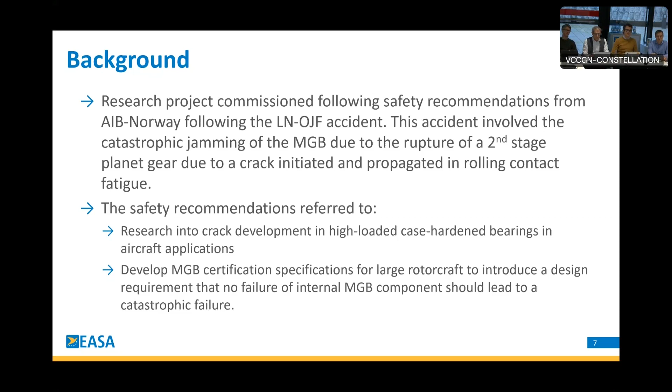So in the case of this particular safety recommendation, we saw some challenges. We've tried to do something with this research to identify ways to improve the situation, but addressing directly this safety recommendation was not found that easy.

So making the link with these safety recommendations, stream 1 is intended to address resilience of the rotor and rotor drive system to failure of individual components. By this, I'm referring to the tolerance of the rotor and rotor drive system design to continue to rotate, if possible, even to operate in case of failures of individual components.

So in order to do this, there were three main activities. The first one was reviewing existing helicopter designs, their configurations and design options when it comes to the rotor and rotor drive system. Then from that review, identify design weaknesses - components where a single failure could lead to catastrophic consequences upon the rotorcraft.

From these weaknesses being identified, the following step was to develop alternative configuration and/or component design solutions that could prevent or at least mitigate such failure. That would mean that, if possible, the failure would be completely eliminated, or if that's not possible, at least its severity will be reduced.

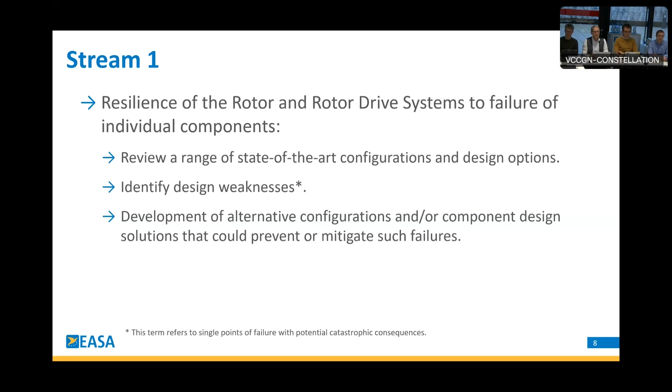So that's it for stream 1, which I guess you can more or less trace to the second safety recommendation that I mentioned before. And then stream 2, which is even more clearly related to the first safety recommendation - this stream was intended to deal with the reliability and tolerance to flaws in integrated bearing races subject to rolling contact fatigue.

Rolling contact fatigue is a kind of failure mechanism that we had not much experience with. This was identified in the accident report, and we agreed with that need. So for this activity, we followed the following approach.

First, the intention was to gather the state-of-the-art understanding regarding which were the critical design and manufacturing parameters involved and contributing to rolling contact fatigue. Within these parameters, just to mention a few, we could consider operating contact pressure, lubrication film thickness, clearances, surface hardness, case hardening depth, residual stresses, and surface roughness.

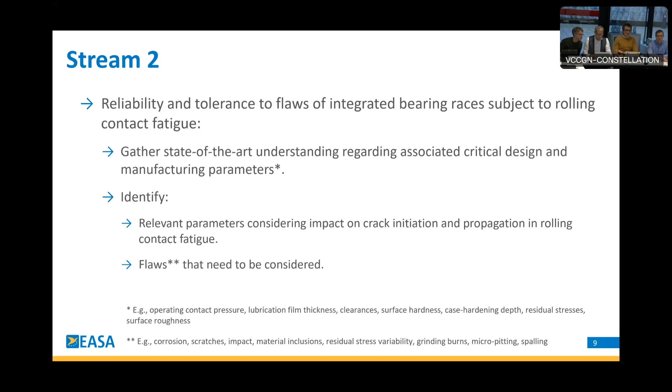When this step was completed, the plan was to put together an analysis and testing strategy in which the following need to be included: inner and outer bearing races needed to be evaluated, as well as carburized and nitrided low carbon steels, also as inner and outer race samples.

Then the impact of parameters identified as critical should be evaluated within ranges applicable to the rotorcraft industry - for example, testing contact pressures that are representative of rotorcraft main gearbox bearings. And then also ensure that we are having representative loading conditions, considering also other loading aspects such as body stress and residual stress.

From that point, the idea would be to perform any analyses needed in support of defining the final test plan, to fine-tune the geometry, adjust testing conditions, and so on. When everything's ready, conduct the test, collect the data, and analyze the data. Within this analysis, the idea was to include additional activities to cover areas where testing was not covering all possible parameter values that we wanted to investigate.

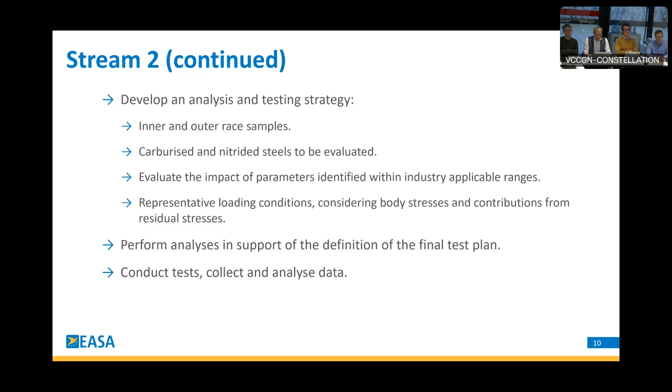We would try to use simulation as much as possible to understand better any changes. And then when all the activities were concluded, the idea was to be able to draw conclusions - first would be characterizations of the parameters that prevent the initiation of cracks in rolling contact fatigue.

Then the identification of flaws for which crack initiation and subsequent propagation may not be precluded. And last but not least, determine factors that promote crack development back to the surface rather than into the core of the race.

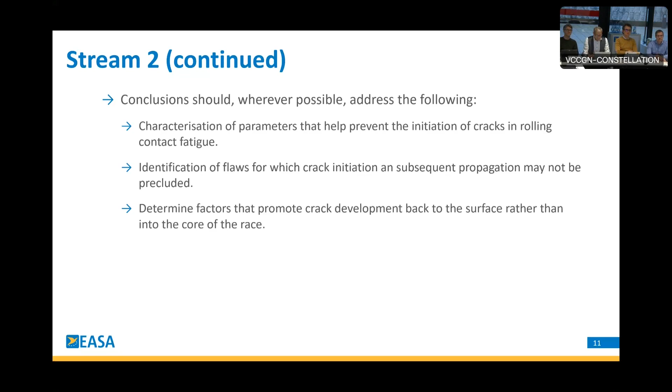So that's it for my brief introduction of why we did what we did. And now I leave you with Jörg Litzba from AH Technik.

Thank you very much, Rodrigo, for the introduction. Now, the following slides, I would like to give the overview of the project implementation and the key results as addressed and commented by Billy in the beginning.

I want to give a short introduction into the agenda of my slides. Of course, I would like to give you first an overview, then go into the details of Stream 1 and Stream 2, and have a summary of the project, and I would like to draw the conclusions at the end.

Starting with the overview of this project, the title was called Integrity Improvement of Rotorcraft Main Gearbox. Since we use some acronyms for the project, we called it GIFT MGB. As you can see on the left side, it's taken from the project title.

It was already mentioned that the background is the accident of the LN-OJF and the related accident investigation findings. The project, after the public tender, ran between June 2020 and March 2024.

The project team itself was made from Airbus Helicopter Technik as the project leader, with the project partners SKF Aerospace, University of Hannover, Department IMKT, and the University of Paderborn, Department WUZ.

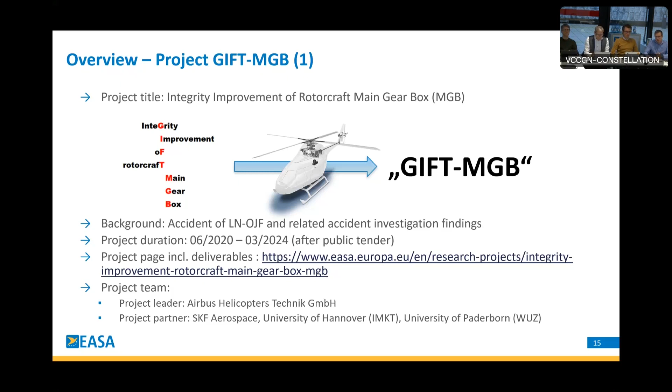Now let me continue with an overview. The project itself is split into two nearly independent work streams dealing with separate aspects of the overall project topic.

Stream 1 is dedicated to a global review of Rotorcraft architectures with regards to the drive system. This links to the second part of Rodrigo's introduction: the review of state-of-the-art Rotorcraft gearbox configurations and component design, with a description and supporting evaluation of these architectures and individual components.

This works out based on design proposals, leading to recommendations for future MGB designs where the aim is to prevent or at least mitigate catastrophic failure modes.

Stream 2 itself is dedicated to baseline research with regards to rolling contact fatigue, shortened here to RCF, on integrated bearing races, where the focus is on determination of the design parameters for component reliability and flaw tolerance under RCF, to determine factors that impact crack propagation and possible crack through.

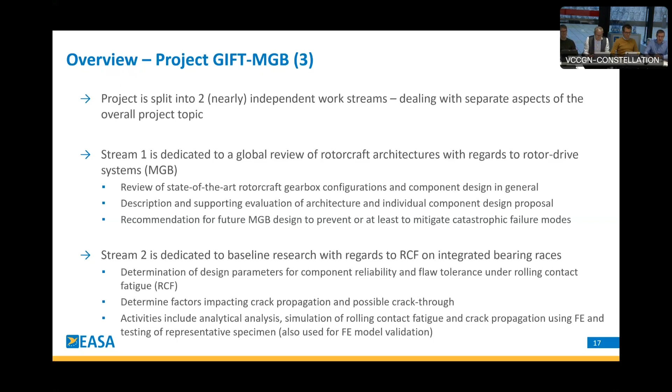The activities include analytical analysis, simulation of the rolling contact fatigue and crack propagation using finite element, and of course significant testing using representative specimens.

Now going further into the detail of Stream 1. To give an overview first, the analysis was done with a focus on differences of the configurations, mainly epicyclic versus collector, using a failure flow diagram approach based on a potential failure modes and consequence analysis.

This also considers field experience, not only in aviation, but also automotive and wind energy, since integrated race-based bearings are not only used in aviation. The failure flow diagrams that were developed use a generic methodology.

Step 1, generic failure flow diagram, then further broken down to the MGB architecture, and then further on going to the flow diagram for the single component.

The analysis includes relevant OEM and drivetrain architectures, but using public data. It's important to note this because the analysis is based on public data, and the nature of that public data means it cannot be excluded that any OEM internal analysis based on further details may lead to different results, for example regarding criticality.

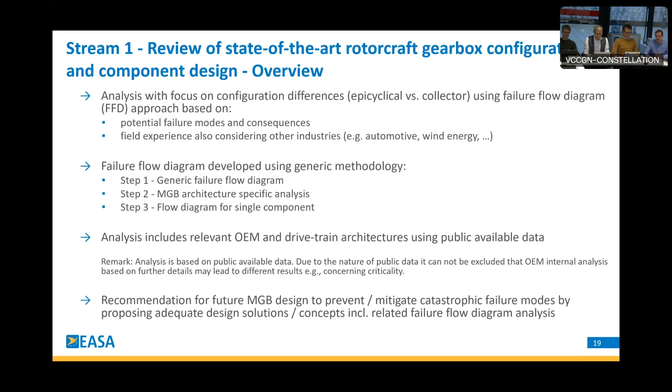At the end, a recommendation for future MGB design, as mentioned, to prevent or mitigate catastrophic failure modes, was done by proposing adequate design solutions and, of course, looking again into the failure flow diagram analysis.

First of all, we did the failure mode analysis and we reviewed accident analysis on relevant helicopter accidents in view of root causes and conclusions out of them. A failure mode analysis focused on the load path elements, mainly gears, bearings, and shafts, where integrated races are used. You see it here in the tables on the left side.

It's a big chunk of data that was looked through, analyzed, and reviewed. On the right side, there is an extract on a planet bearing failure mode analysis, where we have, for example, a lubricant having an effect, with not enough lubricant leading, for example, in 43% of the observed damages to rolling contact fatigue topics, such as worn surfaces, discolorations, and so on.

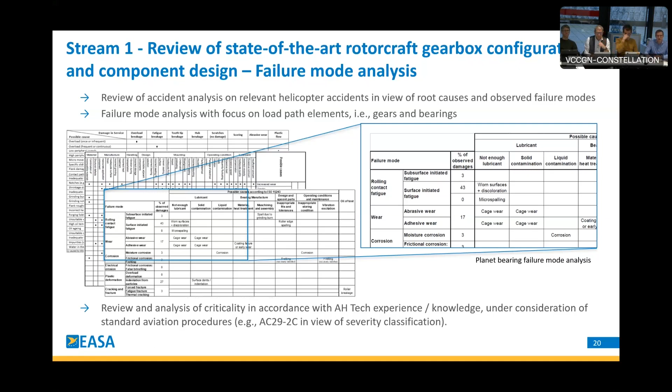Now, the review and the analysis of this criticality was done in accordance with the AH Tech, or ZF, formerly ZF, experience and knowledge, but under consideration of standard aviation procedures. For example, when we did the severity classification, we used the AC29-2C.

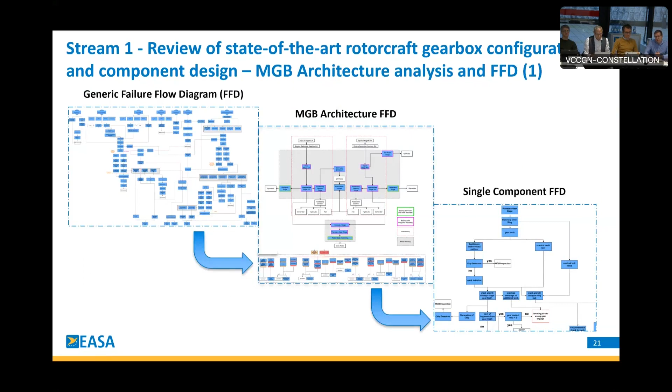To give you an overview of the FFDs, we have the generic failure flow diagram, the FFD, and you see it's quite a big diagram, which is then further used for the MGB architecture FFD, and then transported and transferred to the single component FFD. In the next slide, I would like to dig a little bit deeper into this. I hope you can see the arrow of the presentation, I'll try to do it slowly.

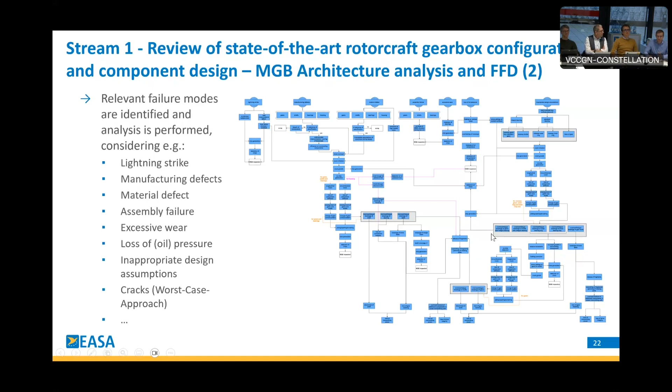On top of it, we have started by considering relevant failure modes, which could be a lightning strike, manufacturing defect, material defect, assembly failure, loss of oil pressure, and so on. We looked at the effect of these failure modes on parts like gears, bearings, shafts, and so on, and assumed not spalling or micro-pitting, but cracking. By working up through the FFD, we looked at whether we can detect it, for example by chip detection or chip alarm, or if we have a crack and a potential catastrophic failure coming from the failure modes on the single part.

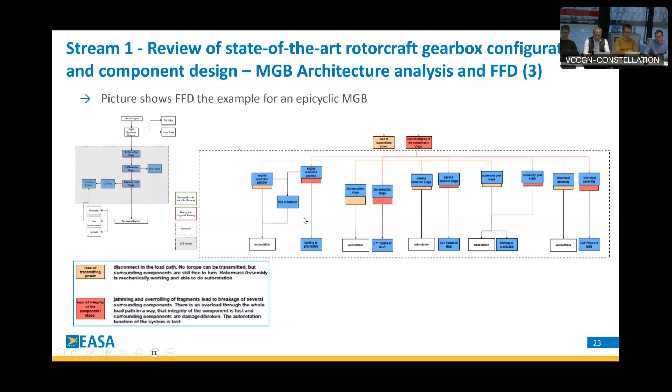These red marked sub-assemblies are then further used in the FFD analysis to go down to component level. You see it here, the second reduction stage, where we start with a planet carrier, for example. There we assume there is a crack of the connection and we walk through the potential effects. On the left side, we will end up in MGB inspection, and power transmission is ensured, so no problem. If we continue other potential failures based on this cracking, we could end, in the worst case, in a jamming of the planetary gear stage.

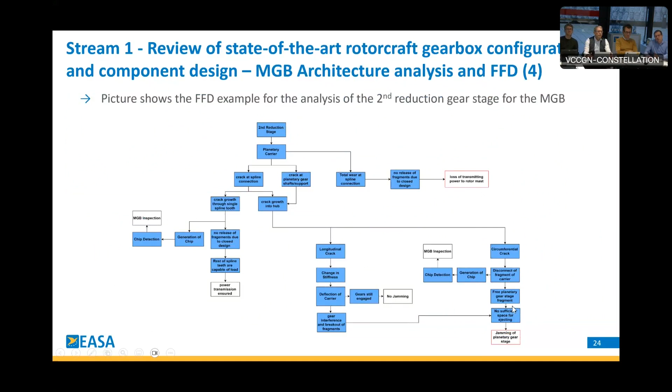A little bit too fast, sorry for that. By this, we know the exact path and we know the component on which we have to focus next.

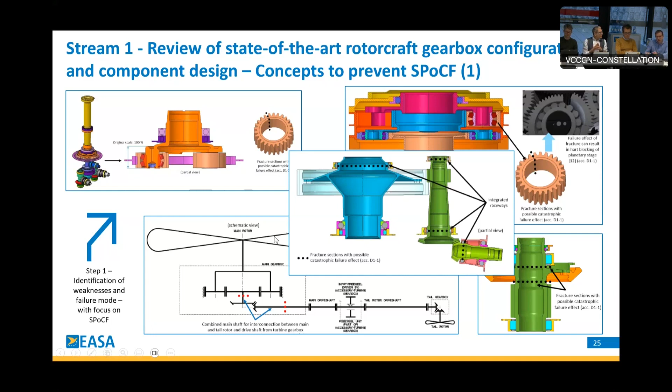On the next slide then, we have step two.

In step 2b, the development of safety barriers was done, and it was checked in an additional FFD analysis if these design changes, these safety barriers, would lead to a non-catastrophic failure at the end, if the FFD analysis result would change.

To make it more applicable to a certain application, I have an example of a planetary system where we would have at the end a jamming of a planetary stage. We have several possibilities in this architecture to avoid this jamming.

For example, introduction of a non-integrated bearing as a safety barrier, or the definition of the side parameter to avoid crack growth into the bearing, or a design implementation to support ejecting of particles from the gear mesh, which means avoiding the jamming.

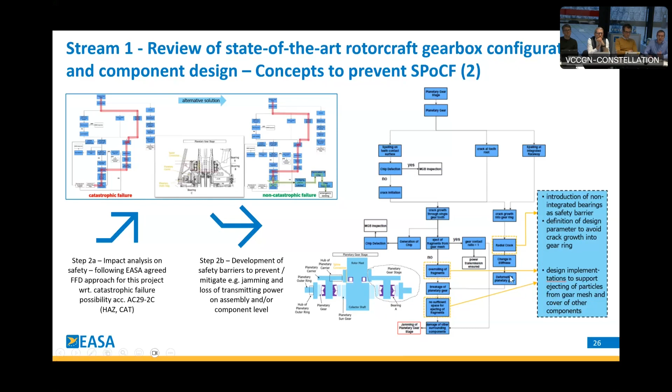Having done this, the next step was to do step 3, the pre-designing and detailing of these safety barriers, and to apply it to this existing concept, to these existing architectures.

For example, here you see it on the left side. There, number 20, is the introduction of an inner bearing, so there is no integrated raceway anymore. In the middle, on top, there is a so-called bordure retaining ring, which means it would hold the planet parts together, so the planet parts could not go into the meshing and jam the planet gear stage.

If you go down, for example, for a shaft, so no planetary solution, a collector solution, this is number 5 here. There's a so-called jamming preventer introduced, a sort of dedicated shaft which would support the shaft in case of a rupture. This means there's also no jamming of the gearbox.

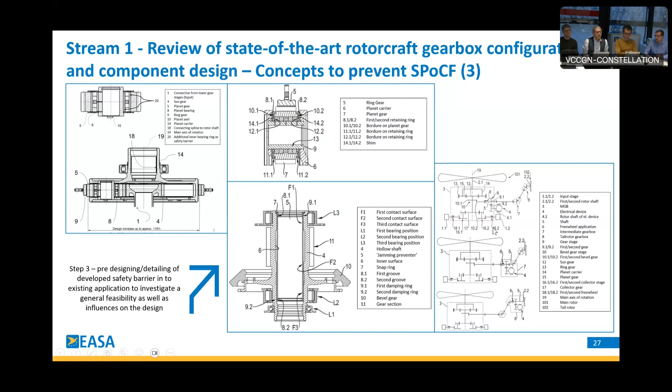We also looked into generic or rotorcraft architectures. There are several options, I do not go into the details for now. It can be looked up in detail in the deliverables as mentioned before.

After the design has been completed, we needed to evaluate somehow how realistic these concepts are. So this is step 4, the application and the concept assessment and the prioritization of these several design solutions.

Why? Because we needed to check further what impact such a design solution has. For example, is it feasible anyway, or is it just a wild idea? Are there boundary conditions, obstacles you need to consider if you want to apply it? There's also a question of what is the most promising solution, and are there any economic aspects to be considered, like more parts to be manufactured or something like this.

But there are also disadvantages or advantages. For example, how significant is the influence on level of criticality? And what is the impact on, for example, the weight, the size, or the number of quantity of parts? In detail, the project delivered a matrix with the solutions, the description, the evaluation, and a certain ranking of what has the highest potential.

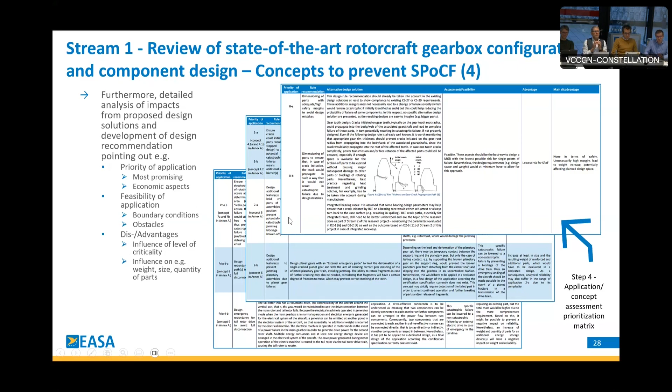Now this ends stream 1, which was more focused on the gearbox architecture at the end. I would like to continue now with stream 2, which is focusing on rolling contact fatigue and the influence on crack initiation and crack propagation.

Again, I would like to start with an overview to give a rough idea of what I'm going to talk about in the next minutes. The investigation here is focusing on fundamental understanding and potential prediction of crack propagation on integrated raceways that are under rolling contact fatigue.

Part of the stream was the analysis of available literature and field experience coming from relevant applications, to see which influence parameters are there, to look for state-of-the-art design methodologies, but of course also to have the lessons learned from accidents and from other investigations.

A test campaign was performed using representative samples for helicopter MGB design, meaning dimensioning, material, manufacturing, loading and so on were considered, where we had the necessity to specify the test specimen, the test conditions, and the test benches, then manufacture the specimen, test according to the test plan, and do a very deep analysis of the test results.

In parallel, and also for validation and verification of the testing, and vice versa, we prepared an FE model definition and validation where we implemented the relevant parameters, for example residual stress condition, loading due to rolling contact, and/or body stress, and we performed simulation of the crack propagation also for various parameter settings.

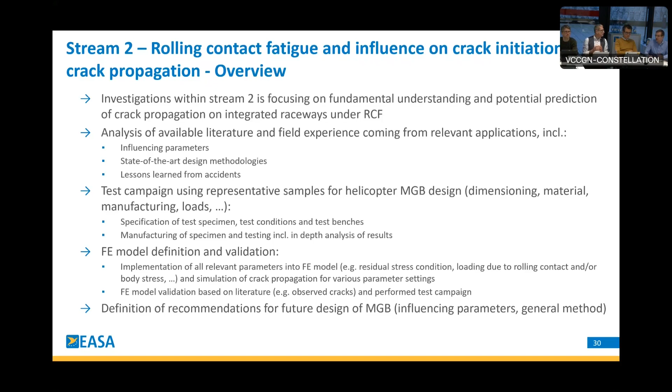Now, first of all, we needed to look into the design criteria and the related parameters. We did select the starting point as a review of the experience on design parameters for typical aviation applications, with the focus on relevant type of bearings, mainly here SRBs and CRBs, meaning spherical roller bearings and cylindrical roller bearings.

The project team discussed known field failures and observed failure modes, also including a cross-effect analysis of these design parameters, which then led to a fishbone analysis on crack initiation and subsequent crack propagation, including the damage, where relevant aspects from the previous analysis were taken into consideration.

Finally, each parameter was evaluated concerning the criticality with regards to crack initiating and crack propagation. We selected low, medium, high, to not have a 1 to 10 or 1 to 50 grading, but we prepared a matrix where we said, for example, we have a parameter.

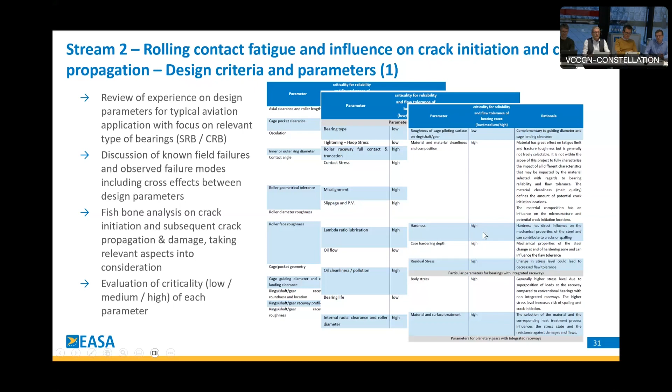Let's take one of the prominent examples, residual stress, which has clearly a high criticality with regards to the open technical question. And then we have a rationale here why we rate this as high. For example, if you look to residual stress, a change in stress level would lead to decreased flaw tolerance. Each of the parameters analyzed are in this matrix. You will find the rationale in the documentation, and this was the baseline for the next steps.

The next steps were then how to deal with the various aspects and how to look into the rolling contact fatigue that is known from the past, the crack initiation, potential crack propagation, and potential crack through. The project decided to develop three main hypotheses based on the mentioned analysis and detailed literature research.

First hypothesis: in case of a pure rolling contact load, an initiation of a crack with a finite depth may occur, but the crack growth ends at a finite depth. A crack typically leads to spalling damage, and this crack growth towards the surface is known for pure RCF. But crack growth into the material is known in combination with a second driver.

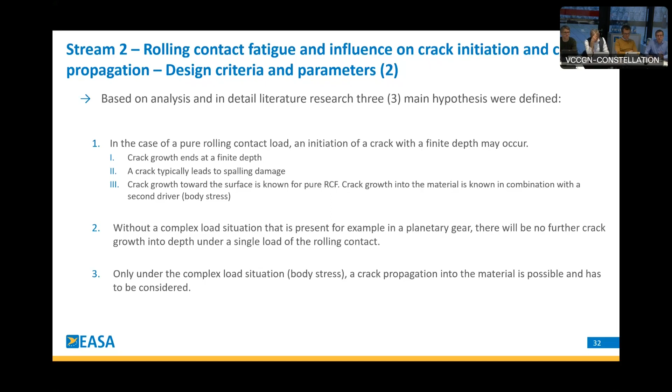This is then leading to the second hypothesis: without a complex load situation, as present for example in the planetary gear, there will be no further crack growth into depth under a single load of the rolling contact. And finally, under the complex load situation, if we have body stress, a crack propagation into the material is possible and has to be considered.

These three main hypotheses were then further used in the specification of the test specimen, and the test specimens are required in accordance with the three main hypotheses. In the project we needed a clear separation for the test campaign, meaning the test phases are named accordingly.

Phase 1.1: pure rolling contact fatigue for different contact pressures. Phase 1.2: rolling contact fatigue plus maximum contact pressure, including a variation of relevant parameters. And phase 2 is the complex loading.

A parameter analysis was further done as a baseline for the test specimen, having the following targets: we need to ensure that the samples are representative, and it should cover the widest possible range of parameters that are still acceptable, because we need to look also at the statistical analysis of this testing. It should consider aviation typical application, for example material loading, and we need to give prioritization to design parameters in view of a project target and expected impact.

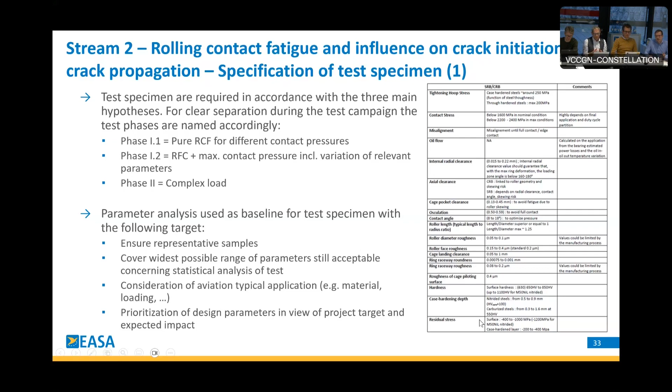This was the baseline, of course, only on the micro level. We talk about contact stresses, about micrometers, we talk about stresses in the part, but we need, of course, also to look at the macro level to have a representative sample.

And therefore, we made it quite easy. We looked at the MGB analyses, done in Stream 1, for example, and we looked at where we typically have the integrated raceways. For an epicyclic design of an MGB, I think it's obvious we have the planet. On the planet, you see it here, it's a CAD modeling just for representative reasons. We have the test specimen called ring, in a version standard ring and ring with a notch, for the complex load situation - I will come to this later.

And if you look at the collector design, for example, we take a shaft, and on this shaft we could have integrated raceways. Since it is a shaft, the test specimen is called shaft, in the version non-hollow and hollow, here too for the complex loading, introduction of body stress, and so on.

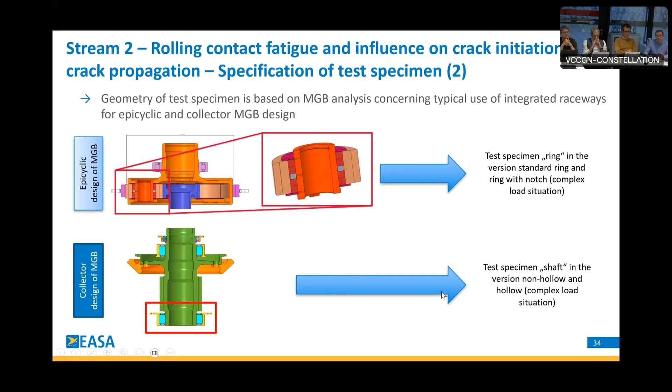A transformation of all of these aspects was necessary with regards to the number of specimens that we needed. So you have seen that we have heat treatment, design parameters, and so on. But of course, we need to select the number of test specimens in a way that we can handle it in the project time and in the project scope.

Based on this number of samples, we said that we will spare 3 additional specimens for phase 2, for the complex load, but selected based on the results of phase 1.

Manufacturing parameters, mentioned before already, selected in view of processes for comparable parts, meaning standard aviation. But we needed an additional process step for the notch that was mentioned, to ensure that we have the good ovalization, the body stress, and so on. And therefore, we selected EDM, electric discharge machining.

One remark here: the white layer of the 32CDV13 inner ring specimen has not been removed. This was a project decision based on some aspects that were discussed in the project team.

And of course, as all of us know, if we have a manufacturing process, sometimes we have a slight deviation, a little bit outside on this side or a little bit too low, but all of these deviations were acceptable, were checked, and had no impact on the test results.

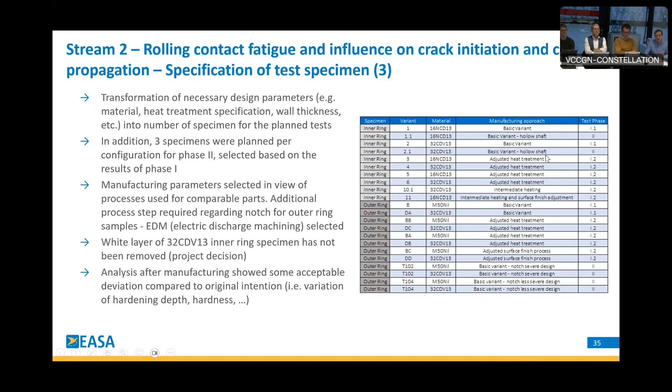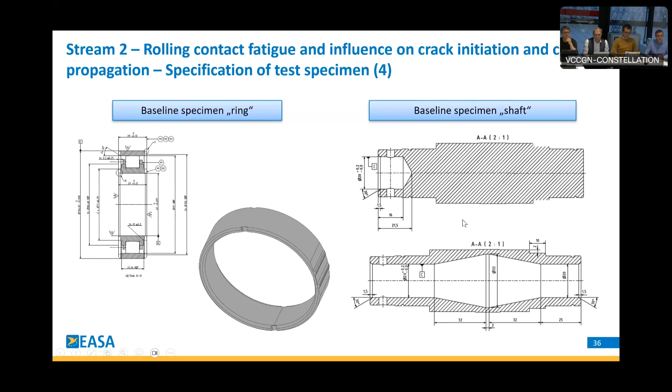Before we did the life testing, we had test specimens and used standard indents comparable to overrolling damage you could expect. But we saw that the initial damage, the spalling we needed, took so long that it would not be feasible in the time frame of this project to wait for, which is also a bit unpredictable. Therefore, we selected a pre-damage modification to ensure a plannable and reproducible spalling damage.

This was done by an indenter with a diamond tip and a force of 100 Newton. So in each test we can ensure a classical spalling damage in, I'll call it short time, but it's still an overall testing time needed to do all the tests in this project. This was leading to the starting point for potential cracks, crack growth, through-cracking, and so on.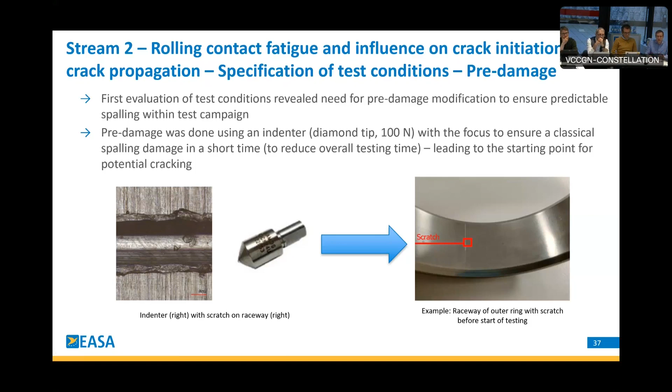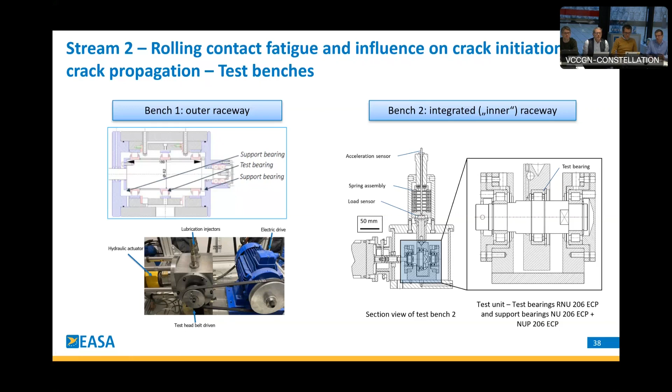The other test bench, on the right side, is also comparably small—it's the inner raceway. It's the shaft specimen where we have the test bearing with integrated raceways on the shaft, and we have the support bearings here. To give you an idea of the sizes, the bearings are type 206 bearings, which are also typical bearings used for any other bearing research project. So, comparably small.

Now coming to the test campaign results for phase 1.1. You see here the pictures we observed. Typical spalling damage was observed for all specimens at 2.4 gigapascal. For the 32CDV13 shaft specimen, we had a peeling of the white layer, so not typical spalling, but peeling—you see it also here in the picture on the right side. There was no spalling at 1.8 or 1.5 gigapascal, and no crack propagation into the depth.

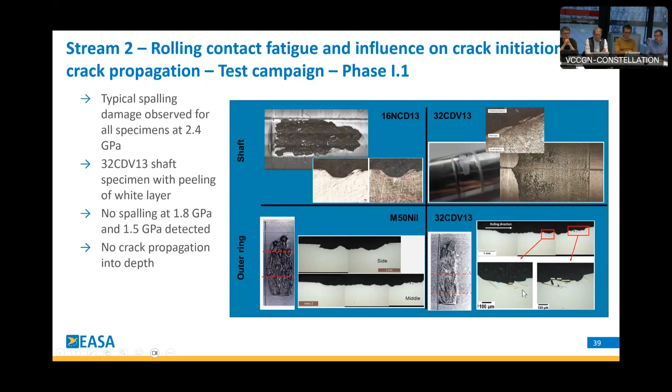You see here, we made pictures of the spalling damage, and also the scratch here. The mouse is a bit slow, so I'll try to go over it. We always evaluated these damages by metallographic cuttings, also to look for subsurface cracking, and you see it here. The cracks always rest at the same finite depth here at the end. But at the end, it was always spalling.

In phase 1-2, we had a variation of hardness, hardness depth, residual stress, and so on. We saw a variation in spalling depth, but we also did not notice crack propagation into the material. The results are generally comparable to the phase 1-1 results, meaning crack growth ends at the finite depth, mainly in line with the spalling depth.

Here's an example on the left side of the residual stress and hardness measurement results, done also to verify that the manufacturing settings and desired targets we want are met. On the right side you see the evaluation of the maximum detected spalling depth for 16NCD13, and the peeling, as I mentioned, of the white layer for the 32CDV. This is the shaft application.

And we see some influence. You see it here for version 1, it's a depth of 0.3, whereas it's 0.1 to 0.15 otherwise. You also see a difference in the peeling of the white layer. Now the question is, based on statistics, whether this will remain if we test 10, 15, or 20 specimens. There is a small result noticed, but I have to say it could also be that for the 3 tests, it's maybe only 1 result.

But there is a difference compared to the outer ring application. The observed influence is not as drastic as for the shaft, for example. You see on the right side bottom, for the outer ring application, it's always plus minus 0.4, for example, here. So the spalling depth here is more or less comparable and the same.

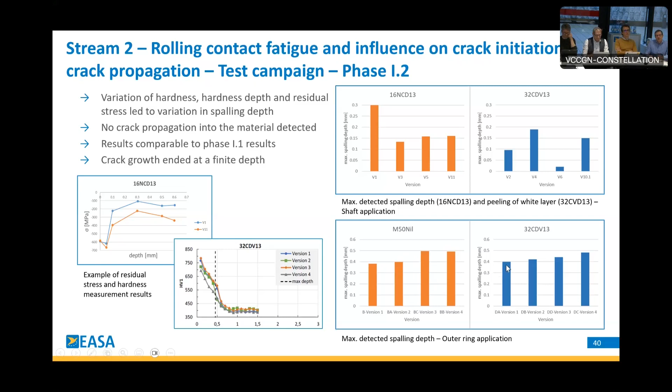And then we went on to phase 2. For the complex loading phase, we started with the shaft testing. For the shaft, first of all, we did find crack propagation into the depth, and for sure not through the part.

We first started with the standard indenter scratch, as mentioned before, but this just led to the same damages as before, spalling, so nothing else. To provoke crack through in the part and help it be more critical, we decided to modify the scratch and add a deeper damage by laser to initiate a more severe crack initiation, to have the crack-through propagation promotion as a pre-damage.

You see it here on the right side, the upper picture, the shaft with the laser-introduced damage, after the test with 2.9 gigapascal. Below you see it with the 32CDV. You see the same pre-damage and crack growth, but whatever we did, we didn't achieve a crack through of the part.

So for the shaft application, we saw spalling damage. As you see here, the surface is spalling, peeling, but even with this large crack initiation, it does not lead to a crack through of this component.

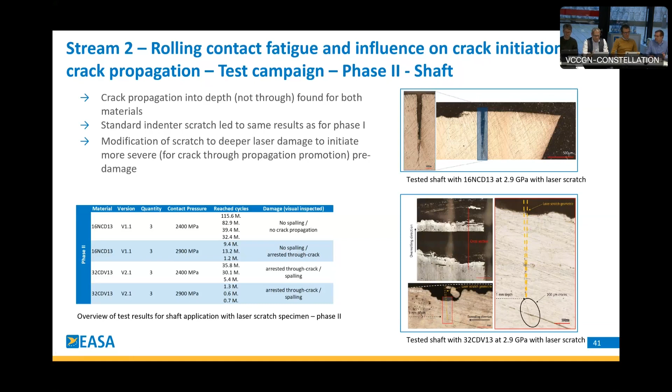If we then go further to the outer ring, we had a crack through detected for M50 nil at 2.4 gigapascal, and the 32CDV13 cracked at 2.9 gigapascal.

In general, we noticed a difference in spalling behavior, and you can see it here if you compare the complex and the non-complex load situation. The green one is the non-complex, phase 1, and the gray one is the phase 2, the complex loading. You see the significant change in spalling depth, and for the M50 here, for example, it's quite clear that you see a complete breakthrough.

So at the end, finally, we had a result which showed us that the test setup is leading to a crack through, but it was, I think, overall harder than expected to get this cracking damage.

In this overview here, you see the tests performed with M50 nil with 32CDV13, and you see a slight variation on the notch here. You see also that we had several quantities and we had a pre-test done. You see it here, the pre-test.

For the pre-test, for example, we had a spalling with a through crack. And if we then look to the same test here, we had the spalling, but no cracking through. So we had some problems here to get this cracking, which was further analyzed. But at the end, you see that you can initiate the cracking.

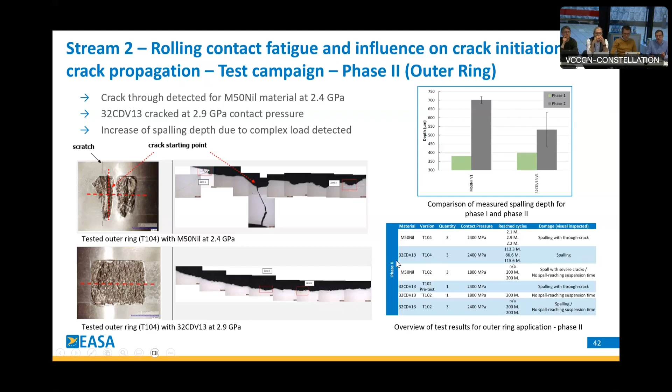Now this is the test side, and I mentioned before that in parallel we also looked at the simulation side. Of course, to handle each effect, we have the helicopter, we put the full MGB in, a full 3D FE model with a lot of nodes, a lot of details in the mesh, but this is quite huge.

You could use a sub-FE model of a rolling contact area, focused of course on the bearing, but even this would lead to significant long calculation times. We checked it in the project, and due to the needs of the project and the desired simulation content, we did a model reduction.

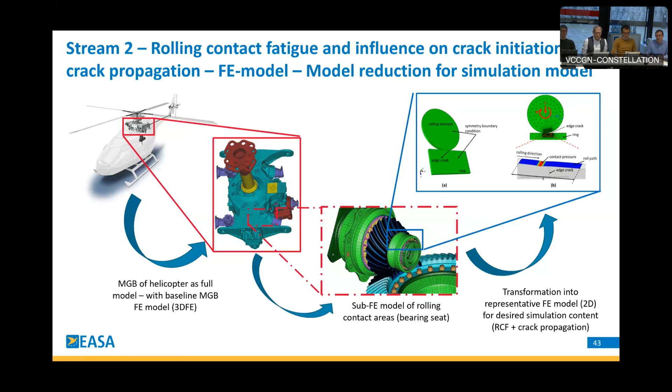We transformed it into a representative 2D model, which was used for the RCF and crack propagation analysis. Nevertheless, for generic design and analysis, it's always possible to go back from the 2D to the 3D. But for this project, the 2D approach was the good approach, and I'd like to show this on the slide, because next you will see the general approach for the crack propagation analysis, on an example FE model for the complex load situation of an inner ring, the hollow shaft, and the ring.

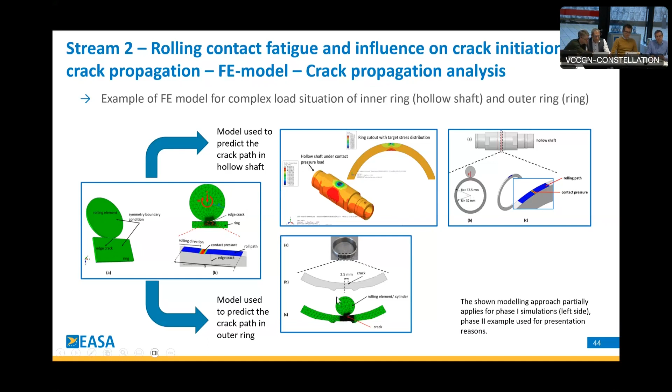We have mentioned already the importance of residual stress, so we implemented the residual stress into the FE model using a thermal stress approach, and we did measurements for this. To show you one example, we selected the hollow shaft, but it's also valid for an outer ring. On the left side, you see the cut parts and the measured values for the residual stress, measured from both the inner and outer diameters of the raceway. This data was then taken into the model by thermal stresses, ending up in the full model, meaning we have the ring and the loading by the RCF, but also including the residual stress.

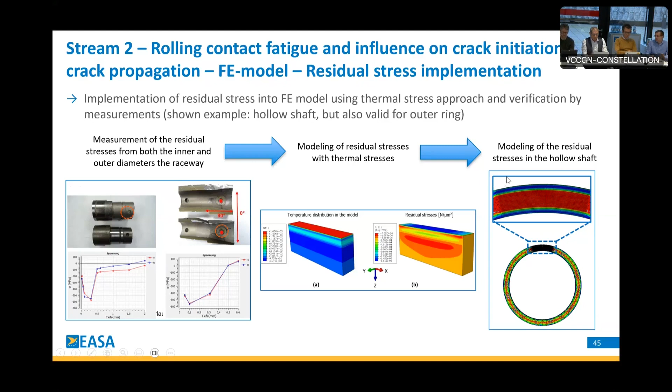Based on the pre-work of the FE model and the setup of the calculation, the crack propagation simulation analysis has been done. I would like to start with the analytical description on the left side. The calculation of the stress intensity factors K1 and K2, and the equivalent stress intensity factor KV, was done on the crack front for each simulation.

Now let's look at the picture here. We have the rolling element and the outer ring, we have the initial crack length, and you will see different colors. Each color represents one simulation step, one increment. So this means one calculation, then the next calculation, and the next, and so on, for each of these crack fronts.

The crack propagation threshold used here, given in the diagram as the red line, was selected for the purpose of this project according to literature, data sheets, and so on. It was not a desire or a target to define it or to challenge it. The crack growth condition is delta KV larger than delta K th. If it is growing, this must be fulfilled.

The calculation of the crack path for the crack stop is the opposite, as you see here. If we see a decrease in the delta KV with crack growth, the crack stop is expected. Now let's go back to an example here.

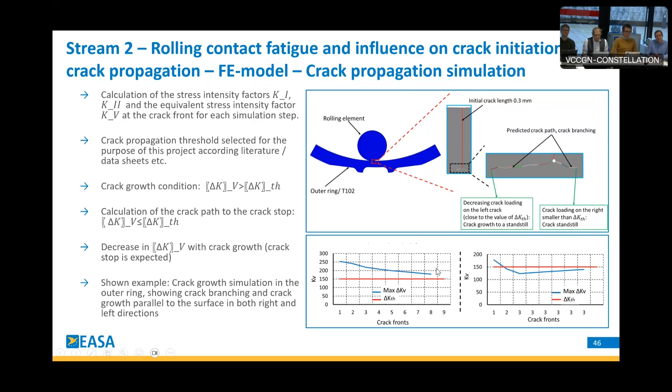These two sides are further shown here in these diagrams: max delta KV over delta K th. You will notice that one is above the red line and the other is below the red line. Coming to the comparison between the results and the simulation, I start with phase 1.

We have the rolling element with an initial crack of 0.5 millimeter, and you see the increments, the calculation of the crack steps. What we saw in the simulation is that after the crack branches, the crack stops. No crack through; the crack propagation in the depth of the material is limited, a finite depth. We would expect spalling, and in the testing we observed spalling. No crack growth into the depth of the material, only, as mentioned, if we cut it through we have these finite depth small cracks, but overall there is a good correlation to the simulation.

For phase 1-2, we have the same initial crack of 0.5 millimeter. Again, the crack path was simulated, and we would expect spalling from the simulation. Here, where the arrow points, is the metallographic cutting of the sample. We see a spalling; the crack propagates only up to this finite depth. If you cut, you see these small cracks, but it's only limited, there's no crack through. So the simulation and the testing also correlated quite well.

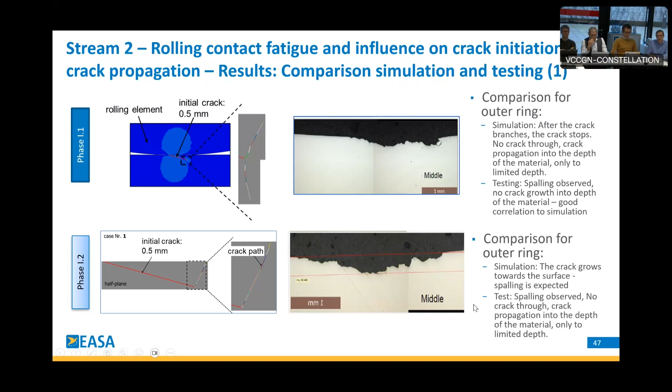Coming then to phase 2. At the end, the results of the FE simulation have been compared to the test results, both for the inner and outer ring samples.

The results for comparison to the test results for the hollow shaft with the laser scratch, I would like to start first with. Each analysis is again based on metallographic analysis of the test specimen to check for the crack propagation in the depth. It's the 2D crack growth simulation, as I mentioned before, in the ring with the notch, also to see what is happening in the depth.

We compared qualitatively both simulation and testing, and as you can see on the pictures, it's correlating quite well. We have the predicted pre-damage and the predicted direction of growth. If we look to the testing, we also have the scratch. Of course we have some surface damage here, but the crack propagation in the cross-section of the metallographic cut is showing it's correlating quite well to the expected direction.

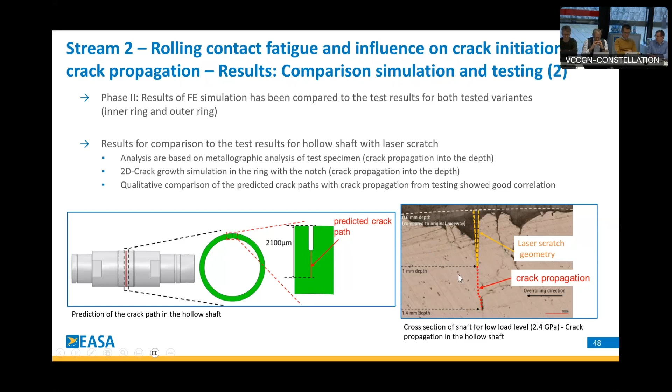Coming to the ring sample with the notch. Again here the analysis is also based on metallographic analysis of the test specimen. The crack growth simulation has seen, of course, the same loads as in the test, as is done also for the other comparisons. The comparison of the predicted crack path using the FE simulation was done, and we expected at the end a certain crack growth.

So this was expected. Now you see the crack propagation phase 1 - this is meant with 1 and 2 in the wording here - and we have a direction change here at the end, which is part 2.

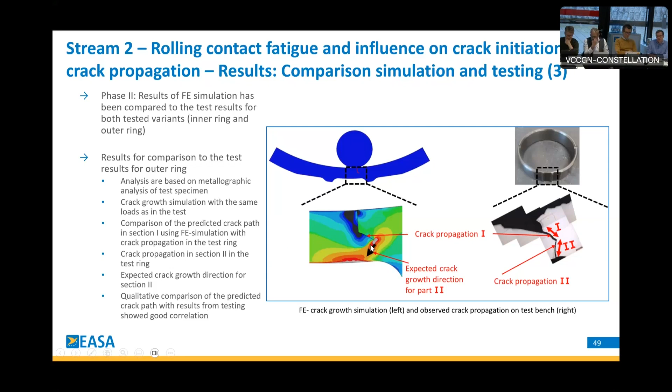If you would put this on top of each other, you could say again it's a qualitative good correlation between the simulation and the testing. Of course it's cut, it's arranged, but qualitatively, I think the depth and also the direction fits quite well.

After doing all of these analyses and studies and a lot of internal project discussions, and also discussions with the specialists here from EASA, we developed a methodology for the rolling contact fatigue assessment with regards to the project goal concerning crack propagation and crack initiation. Based on the content of this research of the GIFT project,

we established a methodology that is shown here. This methodology aims to provide support for compliance demonstration to CS27, CS29, paragraph 571, for certification of integrated bearing races with catastrophic failure modes. The approach itself is based on 4 main steps. I want to excuse because it's difficult to read, but it was the only possibility to get it on this slide here. I will try to explain it.

Step 1 at the end is the evaluation of component design values: the geometry, function principles, known failure modes, geometric data. Evaluation of external loads, for example contact pressure, bearing loads, temperatures. Material properties, also related to crack propagation and crack initiation next to the standard material values. And of course measurement and evaluation of the residual stress profile, since this is the baseline data of a component that you want to use, design, or reuse.

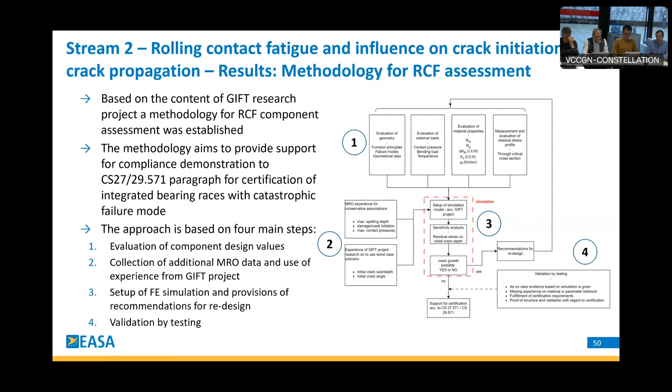But validation, I think, is needed by testing, or at least will be supported, because of the nature of this failure mode and the knowledge up to date. So I would expect that this testing plays a big role into certification.

Having talked about the Rotorcraft architectures, the rolling contact fatigue, and the testing, I would like to summarize the project. First, an in-depth analysis of the current state-of-the-art helicopter MGB architecture was performed based on a failure flow diagram approach, and design modifications to prevent single point catastrophic failures were proposed.

The damage mechanism and failure modes of bearings using integrated raceways were analyzed, and these results were used for the definition of representative test specimens and test benches, followed by the test campaign being performed.

Afterwards, the impact on design and manufacturing was analyzed, and it was checked how the RCF and crack initiation progresses, and whether we have crack propagation or not. The mentioned main hypotheses concerning RCF and the development of crack propagation were confirmed in the end.

Based on in-depth analysis, an FE model for crack propagation was developed, and within the scope of the project it is considered validated. Validation is a big word, but in this project's scope we consider it validated, using data from literature and by comparing with the test results within the project.

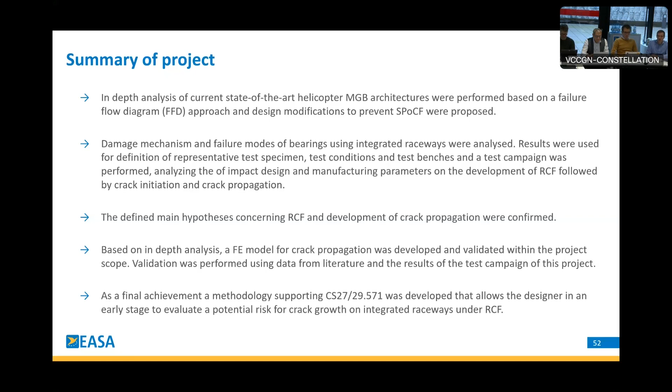Rodrigo said in the beginning that we have to draw conclusions out of this project, so I would like to share some conclusions from our side here.

With stream 1 of this project, a representative analysis of current helicopter MGBs was performed, indicating, based on publicly available data, that a single point of catastrophic failure is possible in each architecture. But it can also be said that design solutions are available to mitigate this, and by analyzing these opportunities, we have the means to avoid such single points of catastrophic failure.

However, as each design change or modification may have a negative side effect, it needs to be analyzed in detail whether there is an effect on weight, size, reliability, and even though it's not part of the project, what about cost at the end?

Within stream 2 of the project, a methodology was developed that allows the designer, at an early stage, to evaluate the potential risks for crack growth on integrated raceways. Due to the nature of the discussed failure mode, each single design has to be analyzed separately.

The methodology contributes to CS27, CS29, paragraph 571, and may include test procedures developed during this project. Test results have shown that crack propagation through the material, resulting for example in a split planetary gear, is only possible under complex load superposition.

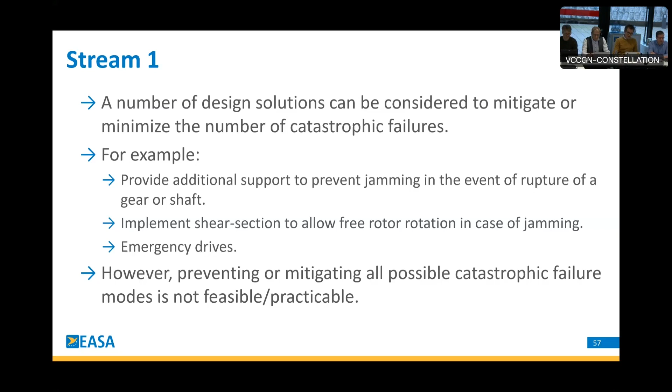However, it's clear that preventing or mitigating all possible catastrophic failure modes within existing designs should not be considered feasible or practicable as of today. The main reason is that this has been a pure design study, so there has been no testing to validate the capability of these design solutions to actually provide the improvements that were assessed just by looking at the design and proposing alternative solutions.

It has to be said that those capabilities are not clearly a given. They are associated to specific design, structural and functional capabilities, which need to be demonstrated at this stage, to our eyes, by test.

So obviously there would be a significant impact if you have to do that for every single alternative design solution that you introduce on your gearbox. Also, there will be a huge impact on weight if you were to remove or mitigate possible catastrophic failure modes. In addition, and to my eyes not less important, there will be added complexity - more parts, more interfaces - and that could have an impact on reliability, which is also part of safety.

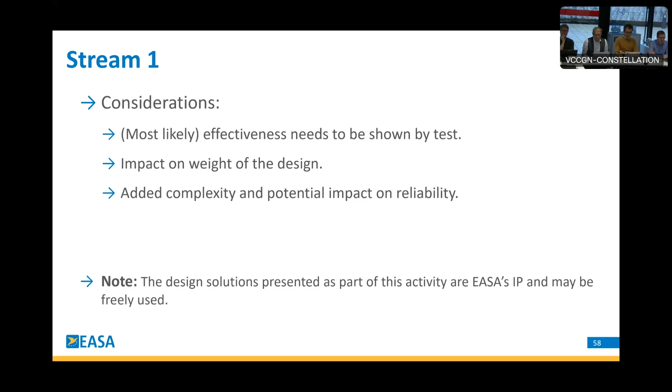Moving on into stream 2, I would like to start with some high-level conclusions. First, I think it's reasonable to conclude that in the absence of significant body stresses - stresses within the whole section of the integrated bearing race - that seems enough, or should be enough, to preclude deep crack propagation in rolling contact fatigue, and as such prevent through cracking and rupture of the part, at least when due to this failure mechanism.

It also seems possible, even though we realized we did not really have the time and capabilities to develop them, to develop a threshold for spalling initiation and propagation in the presence of flaws. However, it seems this is very much application specific, depending on many variables, one being the specific flaw for which you are trying to identify the threshold. But it's clearly possible that when you appropriately replicate your design in a test specimen, you could demonstrate that you are tolerant to certain kinds of flaws developing into spalling.

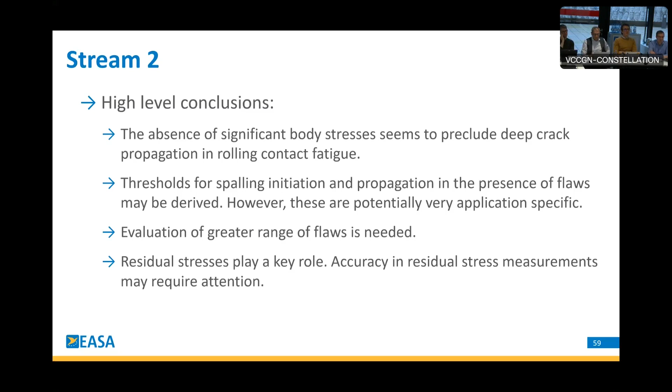Talking a bit more specifically about testing, it's clear for us that testing is an effective way of assessing the impact of rolling contact fatigue on any given design. However, a very important aspect of this testing is ensuring representativeness.

Jörg only touched briefly on this, but when we were doing some tests with the shafts and with the outer rings, there were some results that really we could not explain. There were some samples that sometimes would crack through rather quickly, sometimes they would only spall, and this is something that it's difficult to explain. But at the same time, we found some samples that seemed to behave a lot better and to provide repetitive results, and more importantly, to behave more in line with what the simulations were predicting.

So that is just to say that, okay, it's possible to test, but it makes no sense to just prepare a specimen and put it into a bench with some kind of damage and just run it to see what happens. You really need to make sure that what you're doing is actually going to represent your design properly.

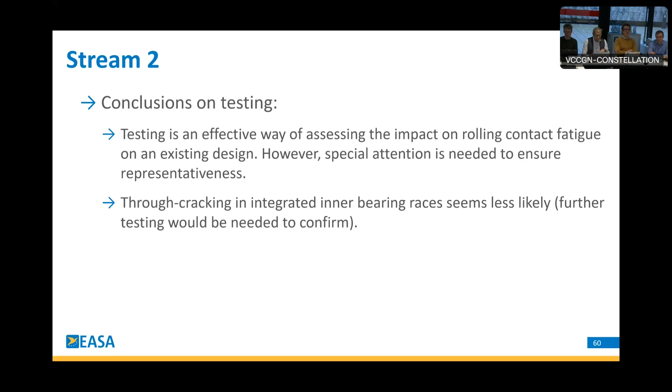Regarding simulations, it's clear for us that simulations are a powerful tool. However, there are further developments needed in order to be able to fully rely on them. At this stage, from our perspective, they have to be heavily supported by testing, in which you basically use the simulations to move slightly away from what you are testing, but never to replace testing.

Also, we found that really with the tools we could identify, crack initiation could not be simulated. Also, we found it was very challenging to detect it during testing, so that we could stop the test when the crack had just started, and investigate that stage of the failure progression. So crack initiation has been a bit difficult to tackle.

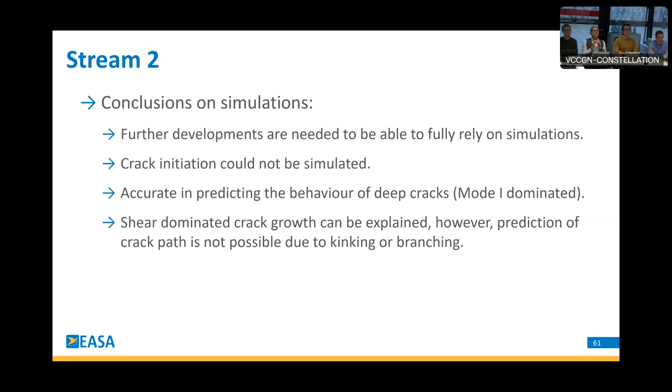And then, for what concerns us as a certification authority, we also take some considerations for our future work. For us, the outcome of this research project shows that it's possible to develop a valid approach to evaluate the risk of cracking due to rolling contact fatigue, and that this would typically require testing and simulation.

However, it's true that, as I emphasized before, it's quite important that when you address your specific design, you ensure the applicability and representativeness of the testing and simulations you are doing. So, this was a general note that the approach and methodology followed for Stream 2 for this project seems to be generally applicable. However, it would make sense to discuss it on a case-by-case basis to make sure there are no other considerations that apply.

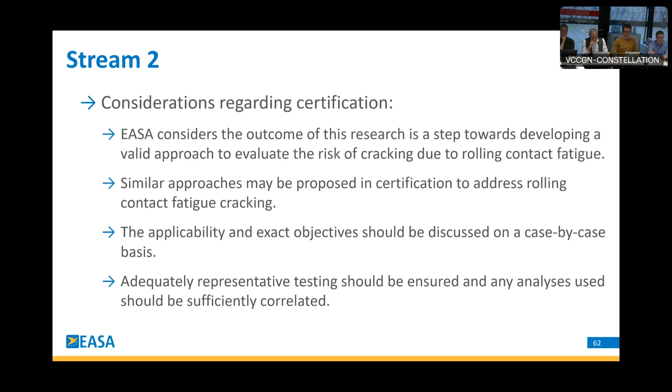And then our last consideration regarding certification would be again what I just mentioned, that at this stage we believe that testing and analysis are needed, and that any analyses are sufficiently correlated, because at the moment, as I said, we cannot fully rely on simulations for rolling contact fatigue.

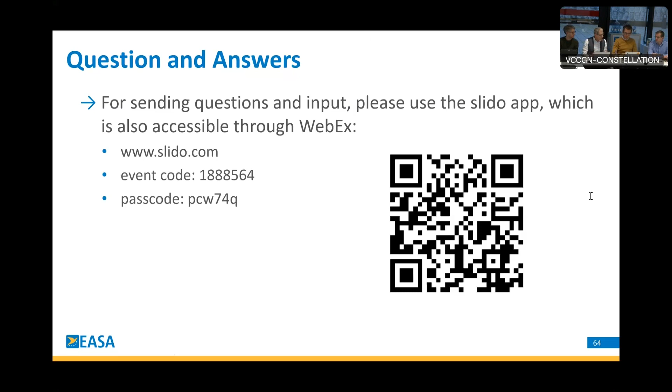Colleagues, we have some further webinars coming up, which are also final dissemination events, just so you are aware. The first one was today, the main gearbox project. We have another one tomorrow, also at 3 o'clock in the afternoon CET, dealing with NORA. NORA is a model to assess aircraft noise, and this project was dedicated to rotorcraft noise. So perhaps we see each other tomorrow.

We have then next week another final dissemination event, again dealing with a model called AeroMS, which is used for market-based measures. We'll see what kind of impact certain market measures may have on aircraft operations. There will also be a training event the next day where you can get hands-on training on this new or upgraded software model.

Then in April, there will be 3 final dissemination events. One is the Shepherd project, dealing with industry standards for drones and U-Space. This project looked into a number of industry standards and assessed whether these standards could be used to comply with the regulations in the field of U-Space.